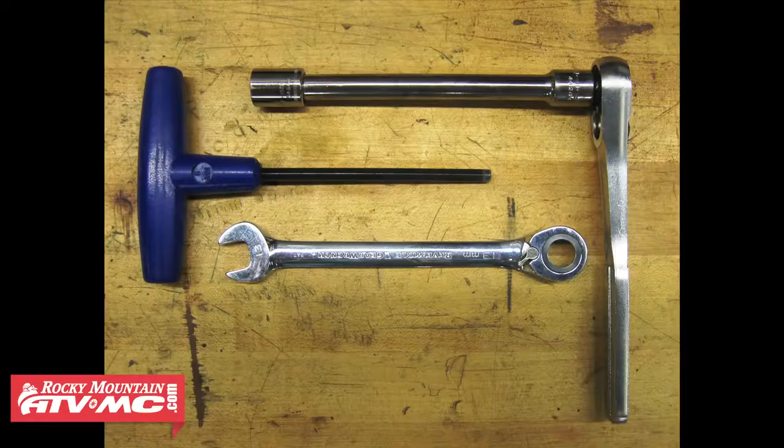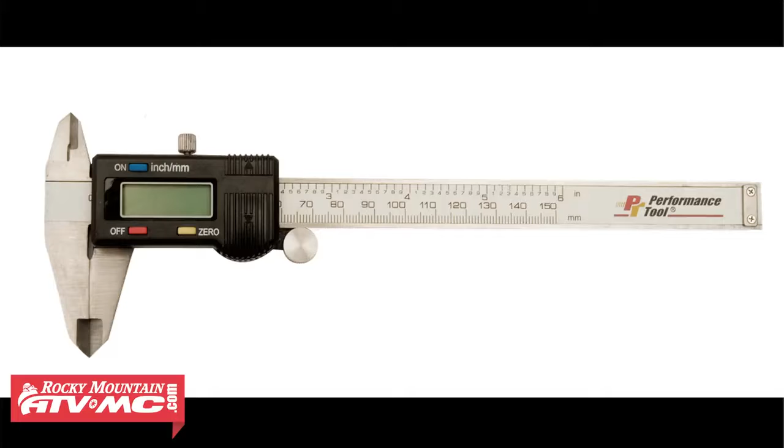Next, we'll need a few standard tools so we can get to the valves, but most importantly, we're going to need our service manual. This contains the very important, very specific specifications you need for this job. It's also very helpful to have a caliper to measure the thickness of each valve shim. We're also going to need some valve shims.

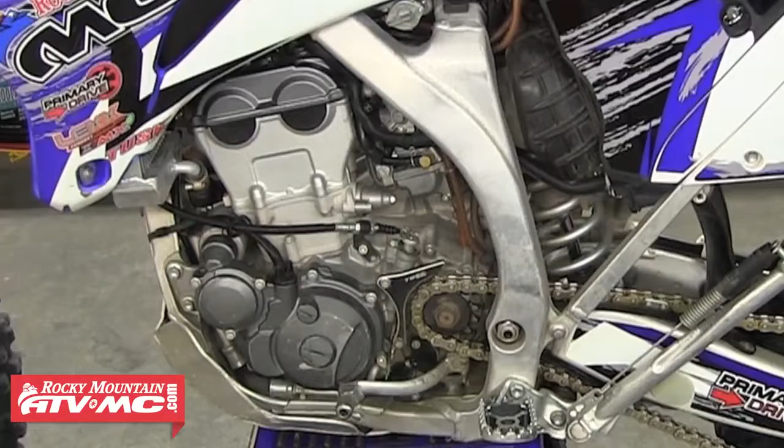It's a good idea to start with your piston at top dead center. Refer to your service manual for this, but most of the time there will be a mark on the flywheel that needs to be lined up with a mark in the top hole. You'll see our piston is currently at top dead center.

So first things first, we're going to want to start with a clean bike. It's always easier to work on a clean motor, and also keep in mind that each machine is different. This process will vary from machine to machine. Today we're working on a 2007 Yamaha WR250F.

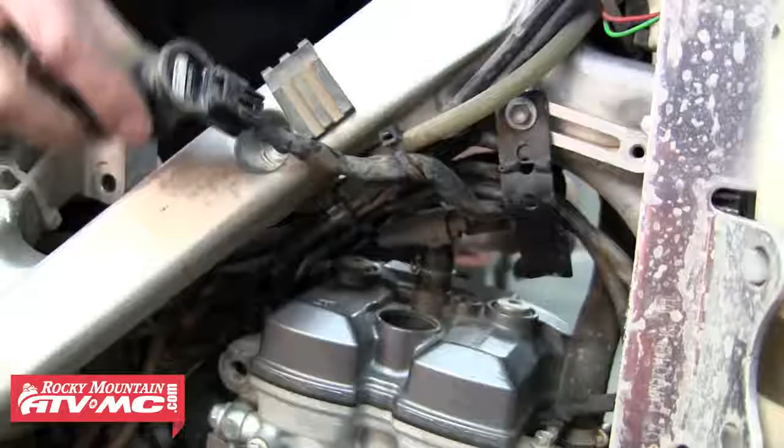First thing, we're going to remove the seat and the tank. After that is the spark plug cap and the valve cover breather hose. After that, we're going to remove the 2 bolts from the valve cover. Usually there's just 2 of these bolts, but sometimes you'll find 3. So once those are removed, we can just remove the valve cover, and that will reveal the valve train.

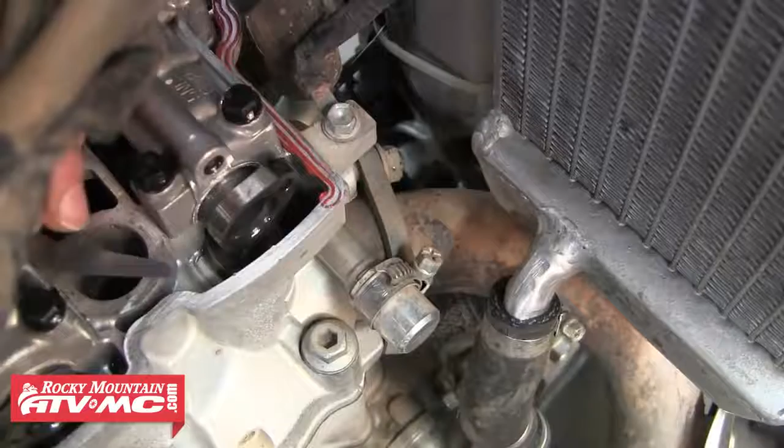So now we can start measuring our valve clearances. We're going to need our feeler gauges now. Measuring the valve clearance is simple. All we're going to do is take the appropriate feeler gauge and slide it in between the camshaft lobe and the valve bucket, which is also known as the tappet. You want the gauge to feel almost sticky underneath the cam lobe. If the clearance is bigger than the gauge, it will slide in and out easily. If the clearance is smaller than the gauge, you'll know because the gauge won't slide in at all.

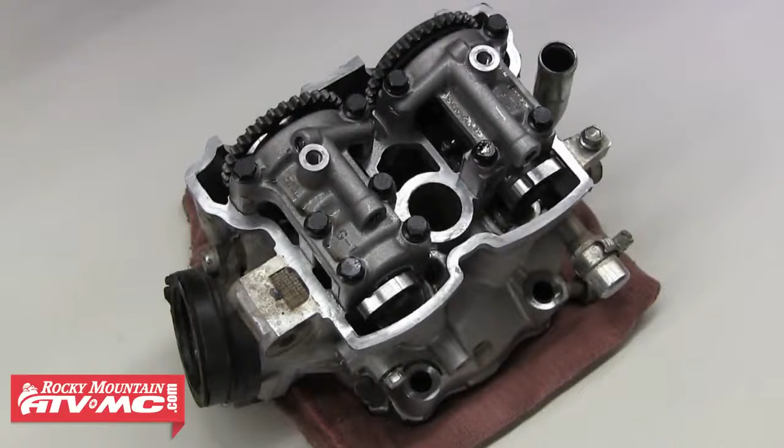For illustrating purposes, we've removed our cylinder head from the bike to better show the adjustment process. Removing the head is not required, and the steps shown will be the same as they would with the head still on the motor.

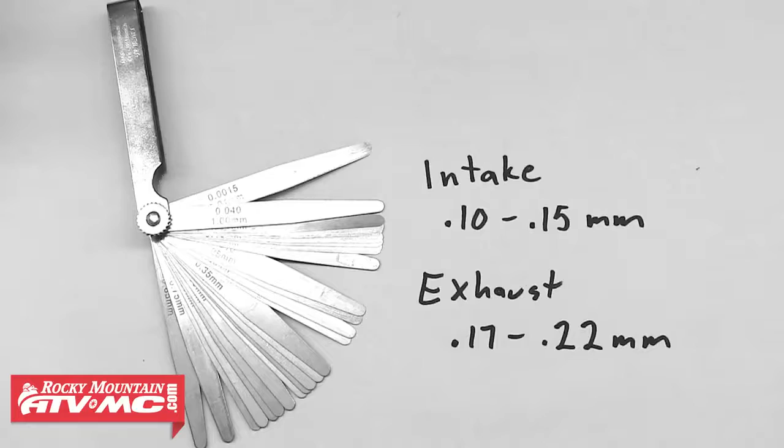We need to refer to our service manual and figure out what our valve clearance service limits are. That will tell us what size feeler gauges we need to be using. As you can see, the service limits for this WR are 0.1 to 0.15 millimeters for the intake and 0.17 to 0.22 millimeters for the exhaust. Most all motors will have service limits similar to this motor.

So we're going to start with the exhaust side. We're using our 0.20 millimeter feeler gauge, and as you can see, it's sliding in under both of the lobes, but not very easily. So we're going to grab our 0.18 millimeter gauge, which is a little smaller, and try that one. You can see that it's a little sticky, and that's exactly what we want. So we're going to record that measurement because we'll need it later on. The right side measured 0.18 millimeters, and the gauge went in a little easier on the left side, so we're going to record that as 0.19 millimeters.

And now we can start measuring the intake side. We're going to start with our 0.15 millimeter gauge because it's the top of our service limit for our intake valves. As you can see, it slid into the right side just fine. Moving to the middle valve, you can see that it won't slide in at all, and that's the same case for the left intake valve.

So we're going to move to our 0.13 gauge, and it looks like it's fitting perfect in the right side. The left intake valve and the middle are still not fitting, so we're going to record the measurement for the right intake valve now at 0.13 millimeters.

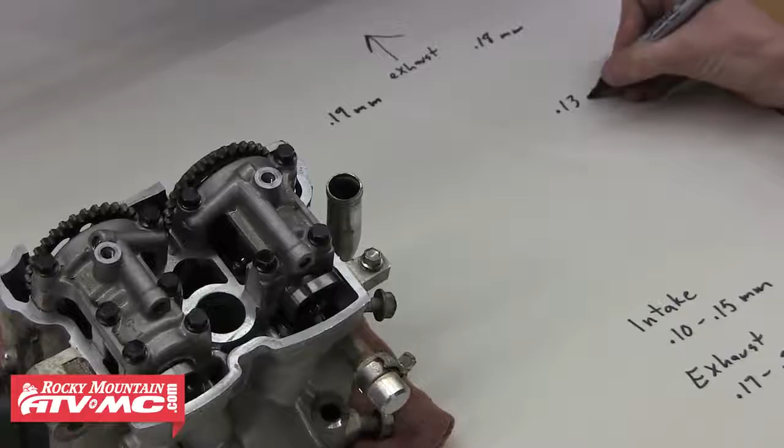So now we're going to go to a little smaller gauge to see if we can find the clearance for the left valve. We're using a 0.06 millimeter gauge, and that slides in just fine, but the 0.07 millimeter gauge fits perfect. So we can record that clearance for the left valve at 0.07 millimeters. After that, we're going to take our 2 smaller gauges and see if there's any clearance in the middle valve.

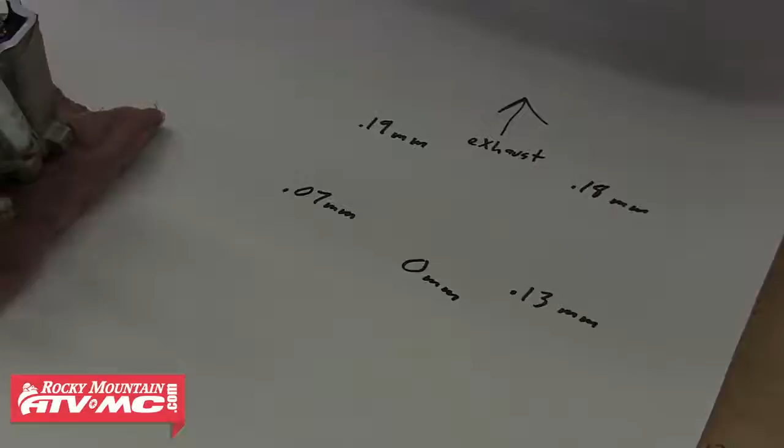As you can see, nothing is fitting between the lobe and the bucket, so we can record the middle valve as having 0 clearance. So now that we've got our clearances measured and recorded, we can begin removing the camshaft so we can get to the valve shims. First step would be to remove your cam chain tensioner. Keep in mind that yours will most likely be a little different than the one shown in this video, so refer to your service manual for proper procedures.

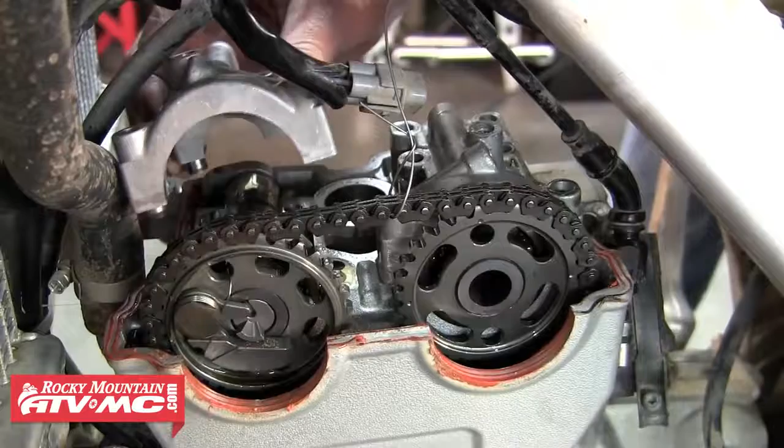Next step is to tie a wire around the cam chain so it doesn't drop down into the motor when the camshafts are removed. We can tie that up around the handlebars. And now we're loosening the camshaft cap bolts. Remember to loosen these in a crisscross pattern to prevent causing any damage. After the bolts have been removed, we can pop the camshaft caps off. Remember, there are usually a couple of locating pins in each cap and a locating clip that need to be removed to prevent them from falling down into the motor.

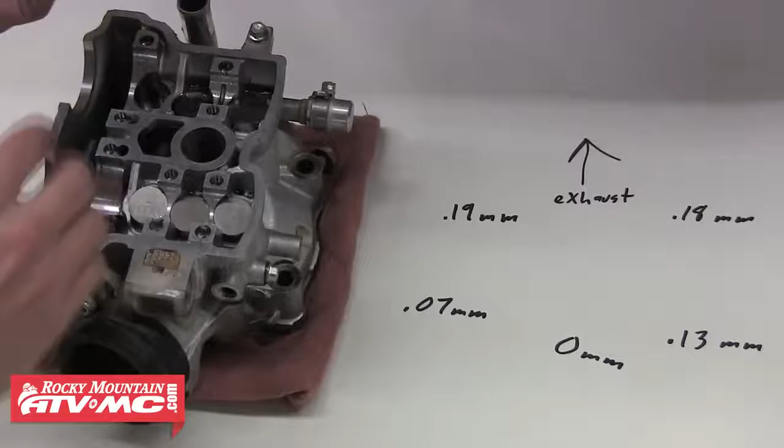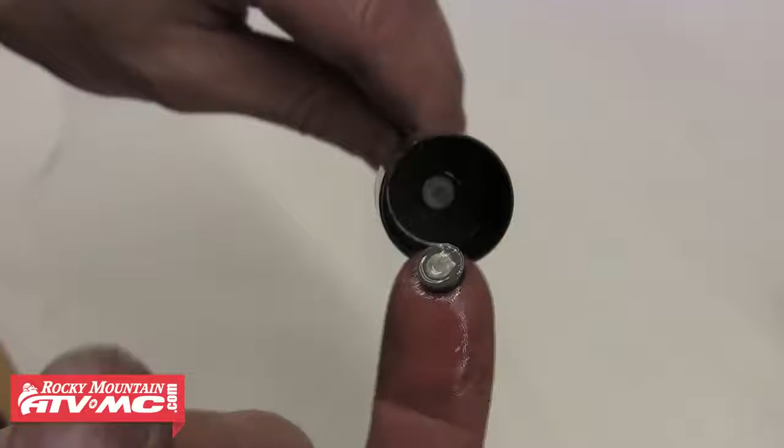After we've removed the caps, we can go ahead and remove both the intake and exhaust camshaft. Doing this will reveal the valve buckets. The next step is to remove the valve buckets and shims. A magnet works best for this and ensures that you don't drop anything down into the motor. Remove each bucket and shim and organize them on your table so they won't get mixed up. Sometimes the shim will stay kind of stuck up inside the valve bucket, and other times it will stay sitting down in the spring retainer, so pay attention so you don't lose them.

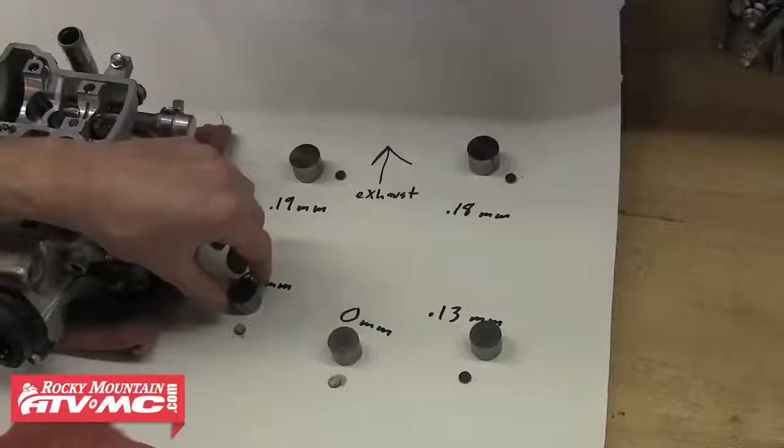So we've got both exhaust buckets and shims removed and placed on the table. We're going to do the same thing for the intake side. Just grab the bucket with the magnet, make sure you've got your shim as well, and then place them on the table. You want to make sure you're keeping everything organized between your motor and the table during this whole process. This is a very critical part to a valve adjustment. Now we're going to clean everything up with a rag really quick to make it easier to work with.

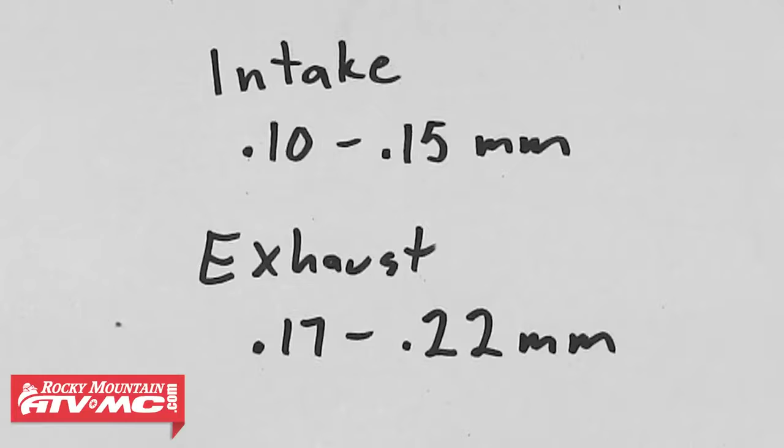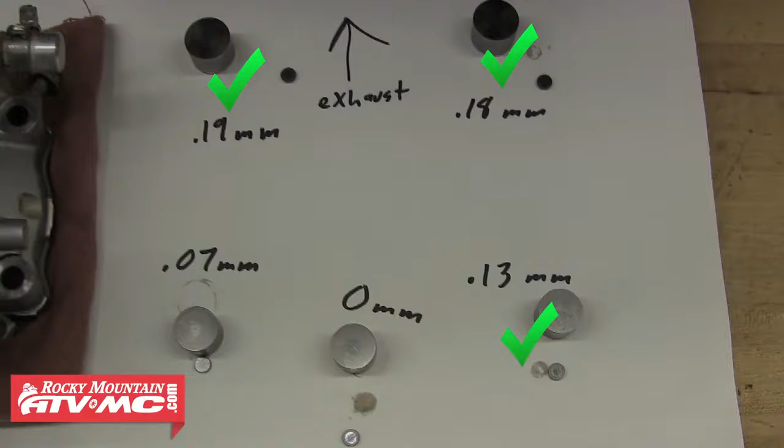It's time to refer to the specs from our service manual. Once again, you'll see the intake is 0.1 to 0.15 millimeters and the exhaust limit is 0.17 to 0.22 millimeters. We need to check the clearances we've recorded and see which ones are still in spec and which ones need to be adjusted. As you can see, both our exhaust valves are still in spec at 0.19 and 0.18 millimeters, which is right in the middle of our bracket, and the right intake valve is still in spec as well at 0.13 millimeters. So now we need to look at our other two intake valves and figure out the correct size shim to install to get our desired clearance.

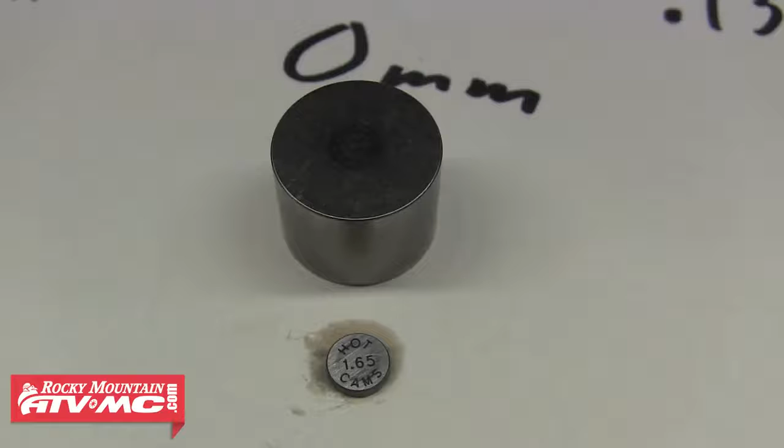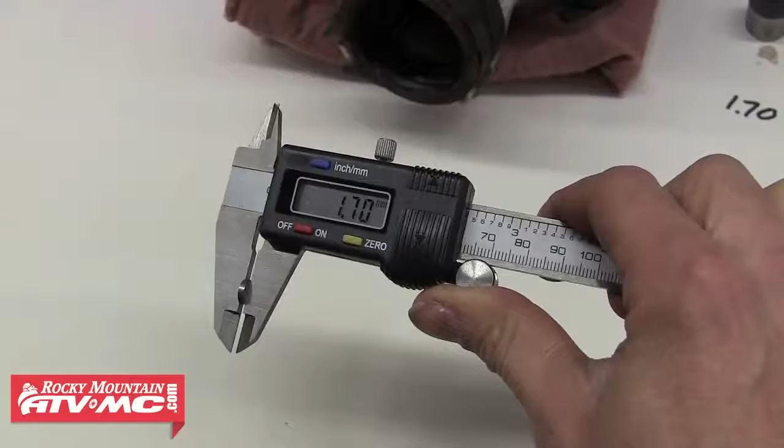To figure that out, we need to know what size shims were in the head. This is where a caliper comes in handy. All valve shims have their size printed on them, but sometimes that number can get worn off, so if you're unsure of what size the shim is, simply measure it with a caliper. As you can see, our left intake valve shim is measuring 1.7 millimeters, and our middle intake valve shim is measuring 1.63 millimeters, so we're going to write that down.

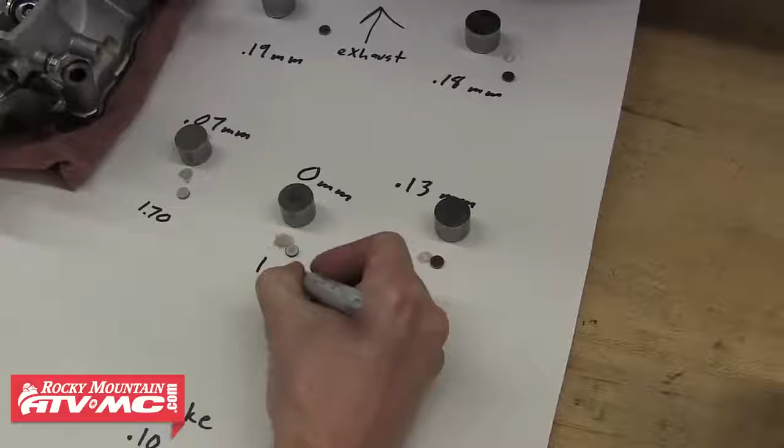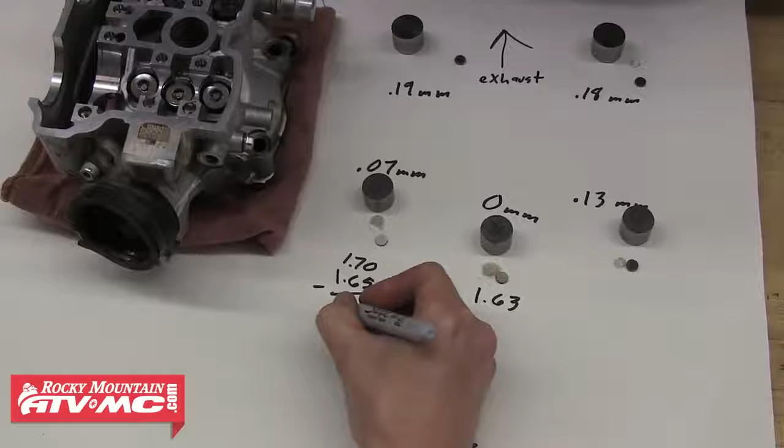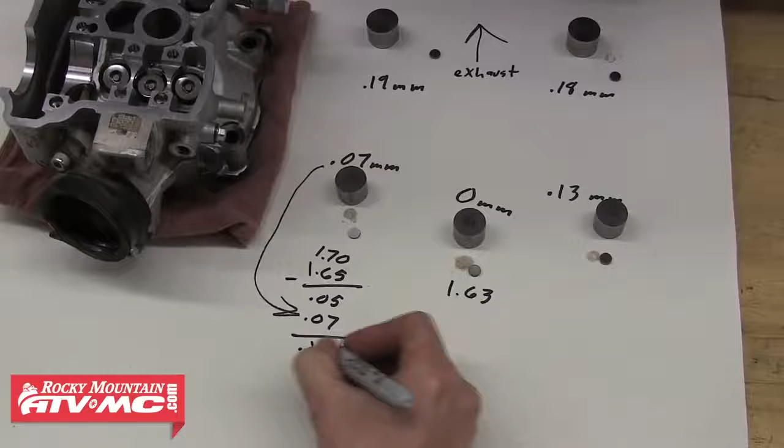So with our left valve, we need to go down on the size of the shim to get more clearance, because right now it's at 0.07 millimeters and it needs to be between 0.1 and 0.15 millimeters. So if we get a 165 shim, which is 1.65 millimeters thick, the difference between that and the 170 that was in it is 0.05 millimeters. If we add that clearance to our current 0.07 millimeters of clearance, we should get 0.12 millimeters, which is in spec, so we'll swap that 170 shim out for the new 165 shim.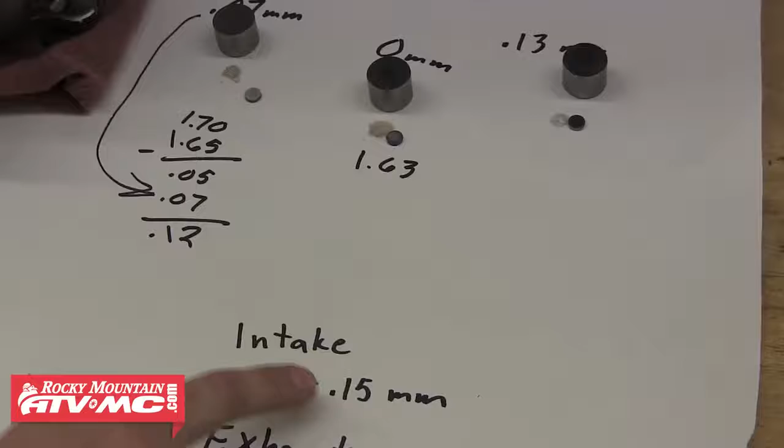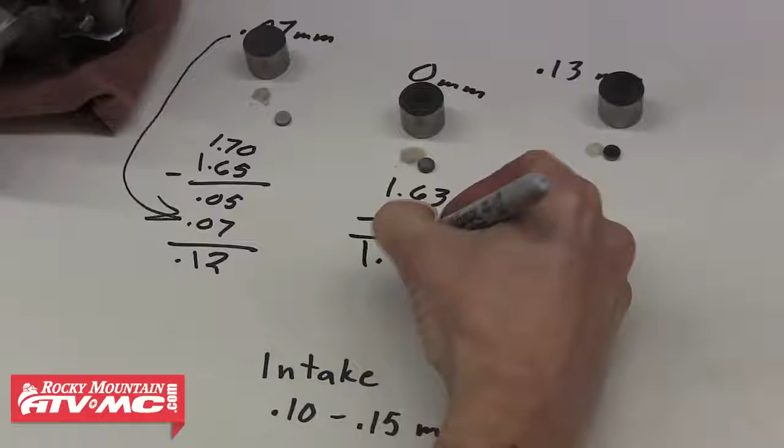And since our middle valve has zero clearance, we're going to use the biggest service limit for the intake, which is 0.15 millimeters, and subtract that from the shim size that was in it. So 1.63 minus 0.15 millimeters equals 1.48. And since they don't make a shim that size, we're going to use a 150 shim. So we can go ahead and swap that shim out.

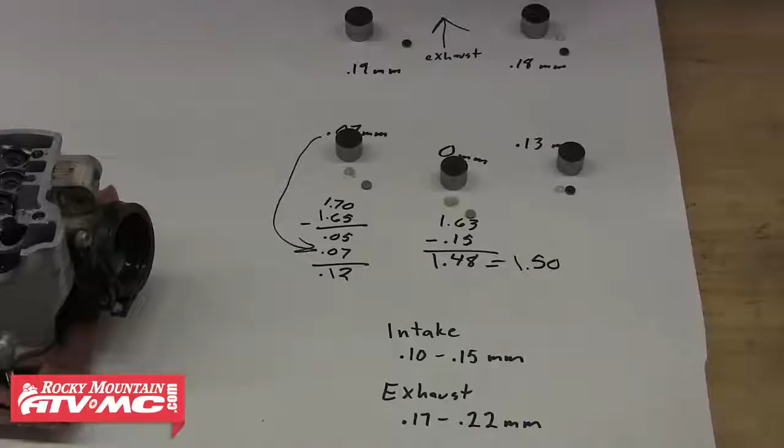Okay, so now we've done the math to get our new shim sizes on the two intake valves that needed adjustment. We need to put our cams back in to check those clearances again. So now we're reinstalling each shim and bucket back into their correct location. When installing the shim, be sure it seats down all the way to the end of the valve, and then slide the bucket down over the shim. Repeat this process for all the valves.

After that, we're ready for the camshafts and camshaft caps. Don't forget the locating clip and make sure your dowel pins are in place as well. Do this for both cams if applicable, and make sure everything seats correctly. We can reinstall the cap bolts and tighten those down. It's a good idea to refer to your service manual for this to avoid causing damage. You'll want to tighten these bolts in a crisscross pattern.

After you get those tight, make sure the camshafts rotate smoothly. If they do, we can rotate the lobes back up to where they sit at top dead center. This will allow us to get an accurate clearance reading.

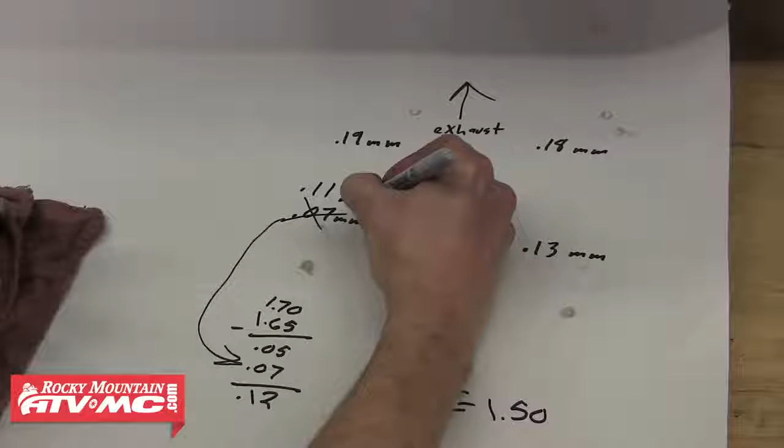We're using our 0.11 millimeter feeler gauge, and it seems to fit about perfect with our left intake valve, but it still won't fit under the middle intake valve. But if we drop down to a 0.07 millimeter gauge, it fits, so at least it's measurable now. So now the new measurement for the left intake valve is 0.11 millimeters, which is in spec, and the new measurement for the middle intake valve is 0.07, which is still not in spec.

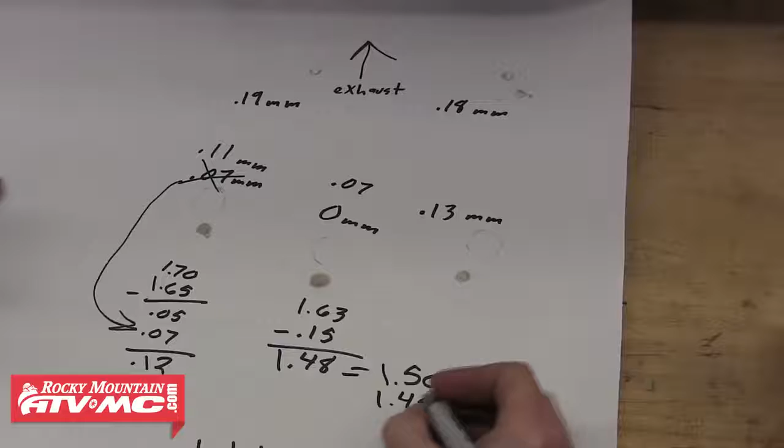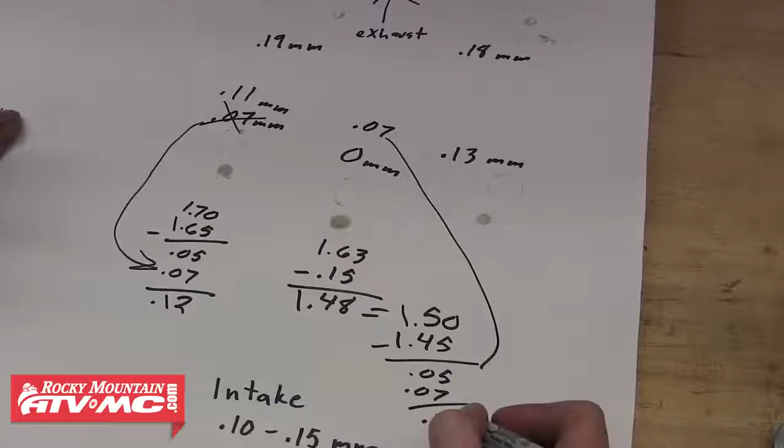So if we swap that shim for a 145 shim, the difference of those two is 0.05 millimeters, and if we add the current 0.07 millimeters of clearance to that, it equals 0.12 millimeters of clearance, which is right in spec. We need to remove our camshaft cap again and remove our intake camshaft one more time to swap the middle valve shim out for a new 145 shim.

So after we've removed the 150 shim from that, we're going to sit that 145 shim down into place and replace the bucket on top of it. After that, we can reinstall the camshaft and camshaft cap, and once again tighten those bolts down. And when we measure it again, it should measure something like 0.12 millimeters, which it does. So now all of our valve clearances are within spec. We can start putting the motor back together.

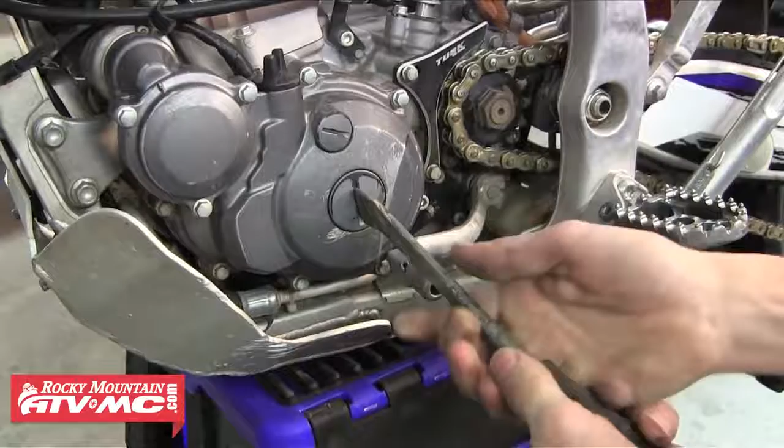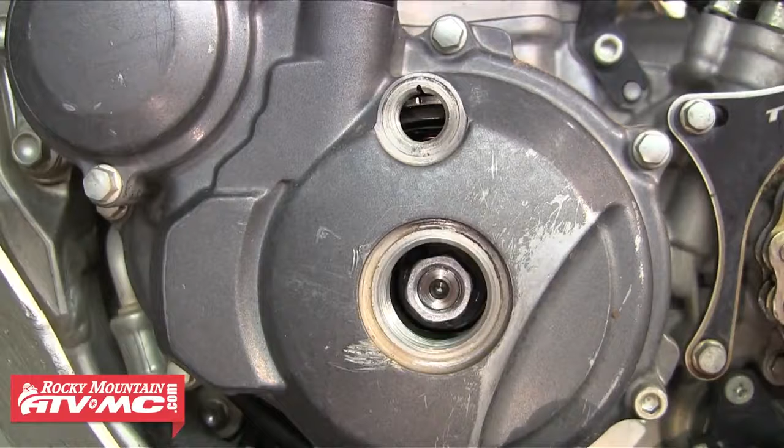First step to that is timing the motor. So we need to remove the engine plugs from the left crankcase cover. The bottom plug is so you can get a socket in there and turn the motor over if needed. The top hole has the aligning mark and shows the mark on the flywheel, and as you can see, both marks are lined up, telling us the piston is at top dead center. If you don't see the mark on the flywheel, you need to turn the motor over until both marks line up.

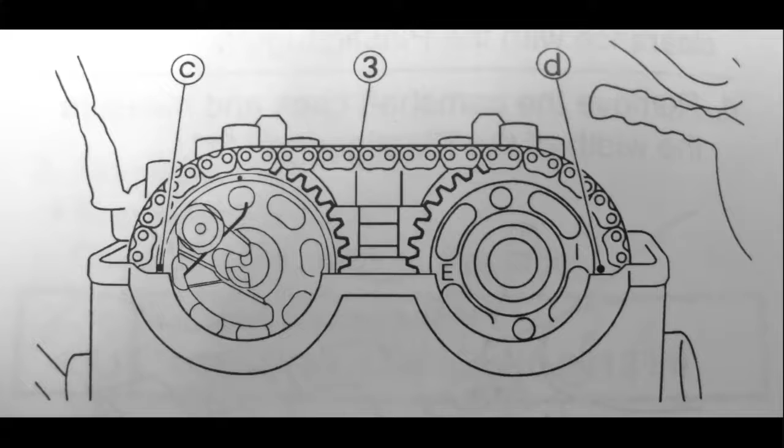You're going to want to pop your camshafts out one more time and apply a little assembly lube to the lobes and journals of each camshaft. We need to refer to our service manual for proper timing instructions. As you can see, each cam sprocket has timing marks on them. So we're going to need to refer to our service manual to get the camshafts in the correct position.

It's important to start with the exhaust cam and pull the cam chain tight up off the crankshaft so there isn't any slack. Align the timing mark where it needs to be, and then run the cam chain over the intake cam and align those marks accordingly. It's basically starting at the front of the motor and then working your way back. The slack in the cam chain will be taken up by the tensioner.

So we've got our camshafts installed and timed using the mark on the flywheel and the marks on the camshaft sprockets. Go ahead and double check your work according to the service manual. Make sure everything is how it should be. Remember, the cam chain tensioner will not be installed until a little later.

So now we're going to install our camshaft caps. First we set the locating clip down onto the bearing. Be careful not to drop it. And then make sure we've got our 2 dowel pins still in the cap and set that down onto the camshaft. It should just pop into place. And then we're going to do the same thing for the exhaust side. Sit that locating clip down into the groove on the bearing, and then sit the camshaft cap down into place.

Then we can put the camshaft cap bolts into place and begin tightening those down. Again, we need to tighten these and torque these bolts in a crisscross pattern to avoid causing any damage. Refer to your service manual for proper torque specs. So after those have been properly torqued, we can go ahead and put those 2 engine plugs back into place and tighten those down.

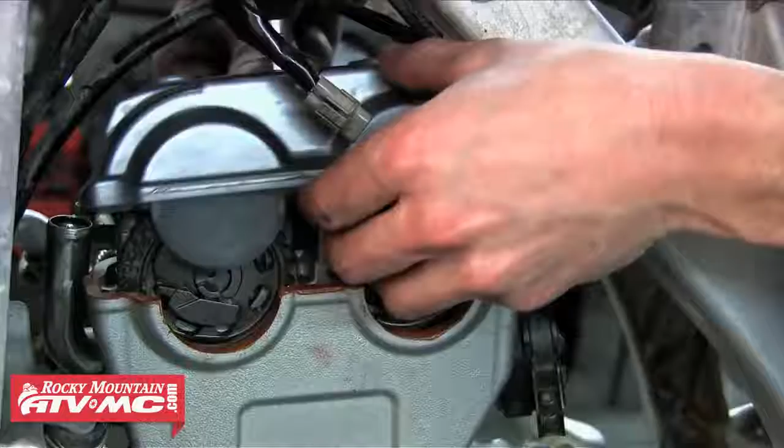Now that those are tight, we can install the cam chain tensioner. Remember that your tensioner may require a little different install than this one did, so be sure to refer to your service manual for this. The next thing we're going to do is apply a light coat of silicone to the cylinder head surface. That's going to help the valve cover seal a little better. Then we can just set that valve cover up into place. You'll notice we've already got the gasket on the top part of it. Then we can reinstall the 2 bolts on top and tighten those down.

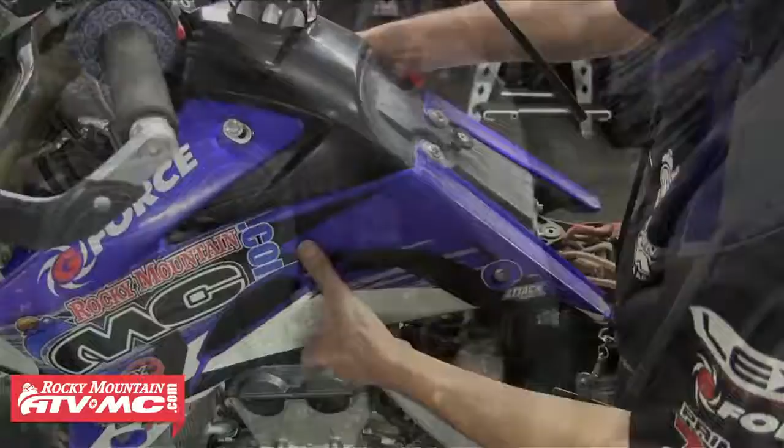The next thing we're going to do is reinstall our spark plug cap. Now we're going to slide that cylinder head breather hose down into place and route that accordingly. After that, we're going to reinstall the tank, tighten those bolts down. And once the seat's installed, we're done with this valve adjustment.